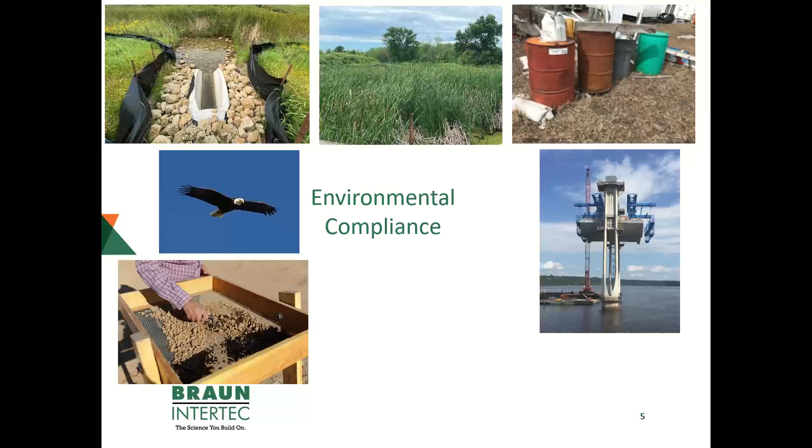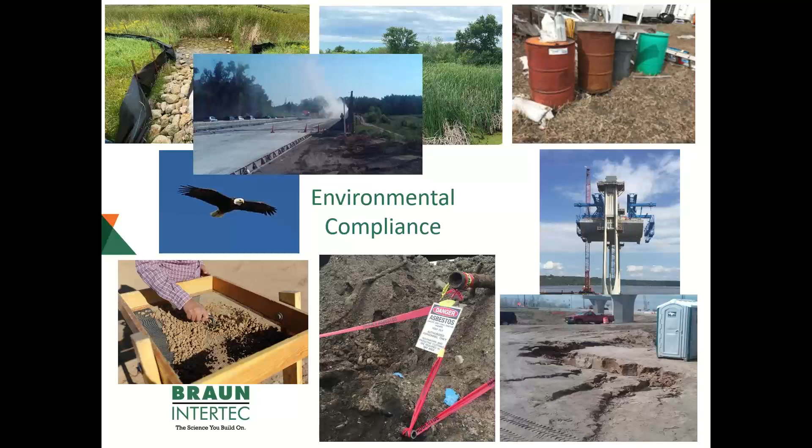There could be things like stormwater, wetlands, storage of chemicals. We have to consider endangered and protected species, work in water including floodplains, cultural resources like archaeology—Indiana Jones type stuff—erosion, contaminated regulated materials, you see the asbestos sign right there, erosion control, you see that rut, that's a rill developing from erosion issues, dust management and air quality, loud noises and vibrations, concrete management and concrete washout, spills—and believe me, spills happen a lot on construction projects, especially transportation projects—and then just general housekeeping. These all fall under that environmental compliance umbrella on a transportation project.

I've worked on a lot of transportation projects, and there are a lot of great people on the environmental side, but I haven't met one person yet who's the expert on every one of these items. If somebody's saying that, they're probably not telling you the truth. What really happens on these projects is you might have one person overall in charge of environmental compliance, sometimes called the environmental compliance manager—there are different terms I've seen. That person's ultimately in charge, but really there's a team of subject matter experts behind them for a lot of these items.

I just want to say that's a pretty scary location for that porta potty. That's all I'm going to say. Yeah, you might fall in. The interesting thing about porta potties is they're actually considered a chemical storage, so technically on projects you're supposed to have secondary containment around them, and you're actually supposed to secure them so they don't tip over. So if the ground is giving way around it, I'm not entering, I'll tell you that right now. That's pretty smart.

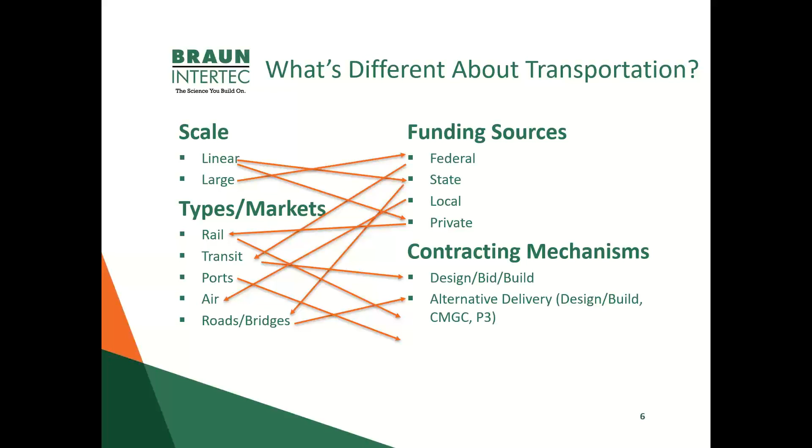You have to make sure you're looking at all of those items globally when bidding the project, but you also need a team behind you that can address each of those issues. It's not just addressing them, but being cognizant of them - especially if you're the environmental compliance manager, you have to be looking out ahead and making sure you're seeing any items that might come up, even if they're not in your wheelhouse. You have to be aware of all those things.

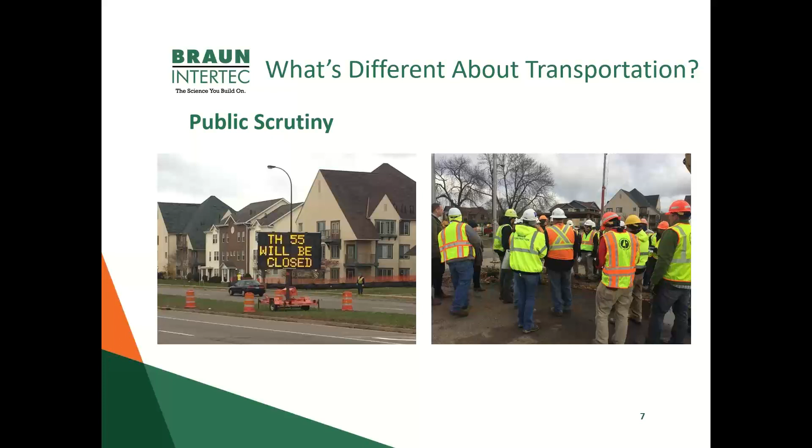The things that are frustrating for us is we'll see barrels for miles and miles, and then we won't see anybody working. They'll close down the lane, and you're like, that was pointless. I'm always like, nice traffic control, what's going on with that? Sometimes it takes hours just to set up those barrels. But again, it's that public scrutiny - that's a key item about transportation.

I don't know if you're ready, Lance, but I'm ready - that was my first AC/DC reference right there. Oh, I think I missed it. That's a little known AC/DC song, 'Are You Ready' - so there you go. I need to be on my toes a little better, you kind of sprung that one on me. I don't know if those following at home saw that, that's a pretty obscure AC/DC one. I'll get some better ones coming up. We've already gotten people saying 'are you ready,' they did it first, so that's awesome. Oh, they did? Okay, yes, awesome.

So on the environmental review and permitting side - this is a topic we could cover for days - at the inception of a project there's something called the NEPA process. The intent is your project is supposed to protect, maintain, and or enhance the environment. Sometimes that's not always feasible, but you have to go through a process showing different alternatives to try to mitigate any impacts to the environment. The big NEPA process is definitely required on projects with federal funding. Federal agencies like the Federal Highway Administration and the Federal Transit Administration have specific guidelines and procedures you need to follow during the NEPA process. Your NEPA folks need to understand the ins and outs of FHWA and FTA procedures to go through the process.

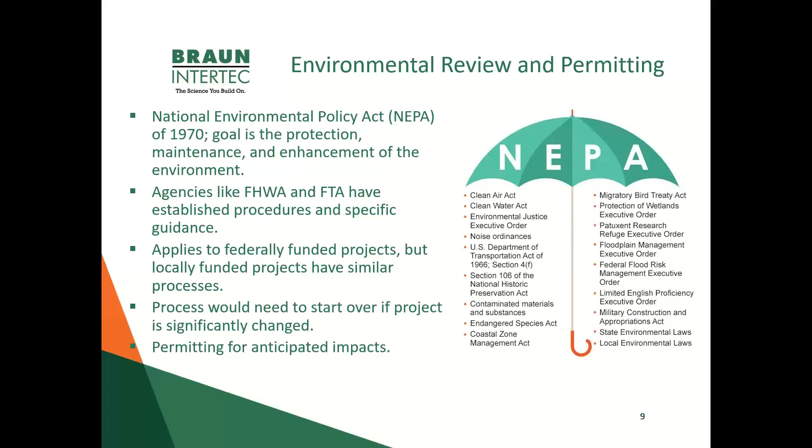I'll just gloss over it, but permitting involves wetlands permitting, 4F, and all kinds of other permits that follow along with that environmental review process to show the project is going to be compliant - not impacting significant wetlands, significant scenic and wild rivers, endangered species, and so on. That's what the NEPA umbrella covers, and if there are impacts that are allowable, that's where permitting comes into play.

That's a big umbrella. It is a big umbrella, and I can tell you that's why. Yeah, that's why we could be talking about that for a long time.

So the next thing, this is kind of what I deal with a lot, is the due diligence side. Now we talked about parcel or plat. Transportation projects take up a lot of parcels, especially if you have a brand new road project, or you're widening a road, or you need a spot to put a stormwater pond, or a park and ride, or a transit facility. Typically, to build that project, you need to buy property, and we put it in this big group of right-of-way, or you need easements or temporary easements. The important thing is, buying property for a transportation project has the same requirements as if you were buying property for a commercial project. You still need to do what's called your due diligence.

There's something out there called the Superfund Law, or CERCLA of 1980, that makes people who are buying property satisfy the innocent landowner requirements. That's showing that you're looking at a property and identifying contaminant sources or potential for contamination, and that you're aware of that when you're buying, and you're getting the proper release of liability so you're not associated with those contaminants. DOTs are not exempt from this requirement. In fact, sometimes public agencies are held to more scrutiny.

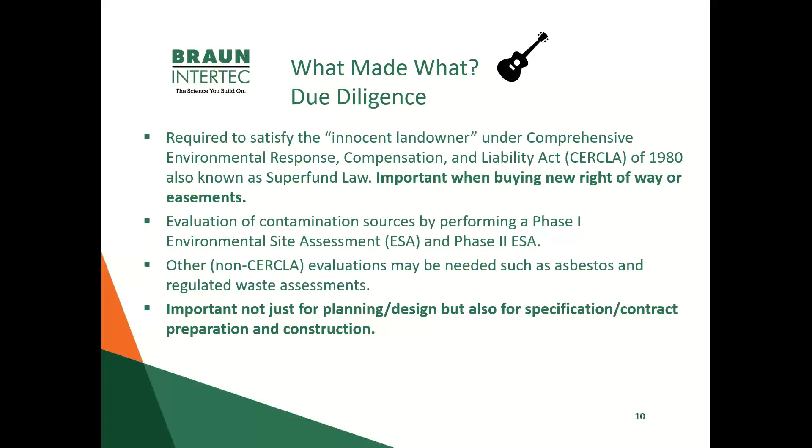So we kind of briefly touched on Phase 1 ESAs and Phase 2s, and I'm not going to go through it, but the Phase 1 side is more of a desktop review. There is a site visit reconnaissance part of it, but it's mostly looking at historical aerials, land use areas, trying to figure out if there's a dry cleaner there, it likely might have some impacts to the soil or groundwater. So it's more of a desktop review.

The Phase 2 is more intrusive, and it requires the collection of sampling to actually confirm the presence or absence of contamination. So that's where you see your drill rigs, or we do test pits sometimes, or test trenches with excavation equipment. That's where you grab your samples.

The one thing that people get kind of caught up with on Phase 2s, especially with transportation, is they only look at places where contamination might be. So, okay, well there was a tank here, so we're gonna go where the tank is. And that's a good place to look for that material, but you also need to make sure that, say, a stormwater pond is 15 feet on the other side of the tank, you might want to put your boring or your location there, because you want not only to find the contamination, but you also want to know what you're going to run into during construction. So you really need to focus your sample locations and your depths, not just to where the likely contamination is, but also where you're going to be doing construction.

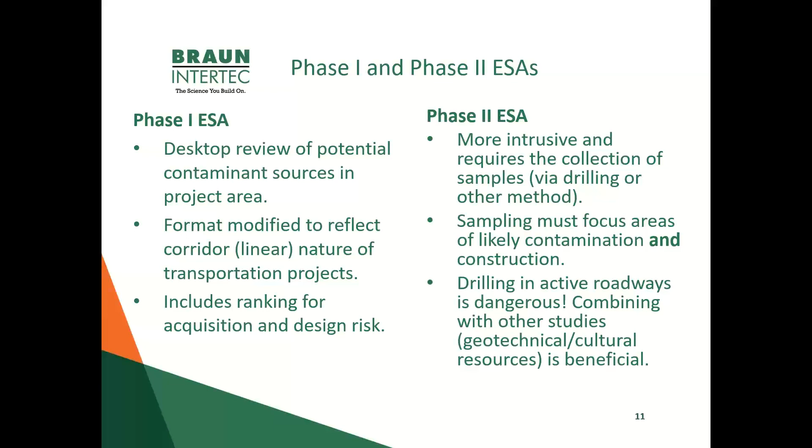So this is just a real quick example. I didn't mention this, but a Phase 1 is a little different than a typical Phase 1 for a property. The reason why, again, is back to that scale and linear aspect of a Phase 1 on a transportation project, is that you cannot look at each property individually, you would take years to do a Phase 1 if you went through each building and did everything to a standard ASTM. So a lot of times for transportation corridors and projects, you do a modified version of the Phase 1, where you're looking at the parcels and trying to put them into buckets.

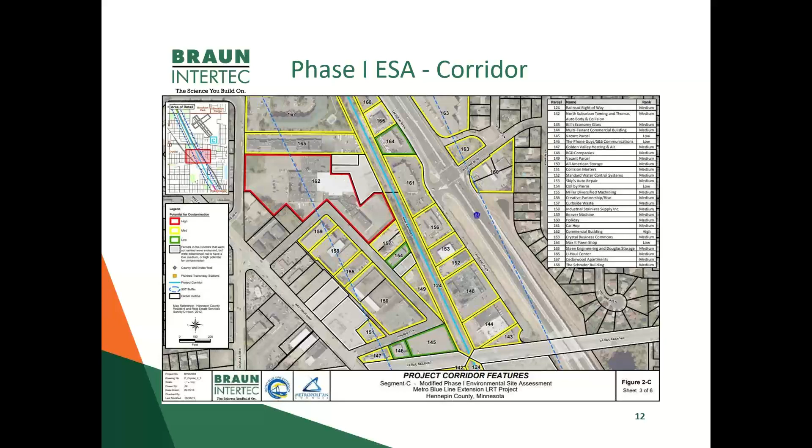That's interesting. Does that make sense? It's more of a high level view. Yeah, so it's different.

When you get a consultant that hasn't seen that type of format before, it takes a little bit of time to understand it more. It's different thinking. It would take forever if you're doing miles and miles of highway or roads - it would take forever to do a phase one on each site. So you have to be high level, and you accept a little bit of risk under that, but you have to keep the project moving.

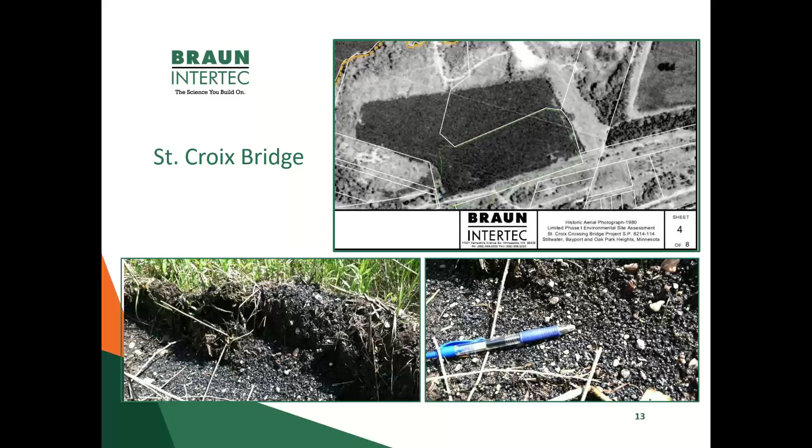Coal slag is a solid waste that can contain higher concentrations of metals and everything. For the St. Croix project, this location was selected for a stormwater pond. So we went out there and tried to evaluate the extent of the slag, because that photo was from 1980 and it didn't look like that now. We did a pretty extensive investigation of where the pond was - we quantified the slag piles, looked at all the pier locations for the bridge, and tried to quantify this all as part of the specification process, so the contractor knew what they were getting into, and we could estimate costs for the project.

The interesting thing is we were out there digging, and found out later that the slag wasn't our biggest issue. There was a dump - somebody filled in the wetland with a whole bunch of dump, and there was asbestos throughout that entire dump. So that whole project turned into a separate project where the owner bid out the pond digging in advance of the bridge project because they didn't want to slow the bridge project down. The pond was actually dug before they even started construction of the bridge, which was interesting. But that's the reason why you do some of this stuff ahead of time - it can account for the schedule and help streamline things. That's what a phase two will show you - it'll show you surprises, hopefully, if you're doing it right.

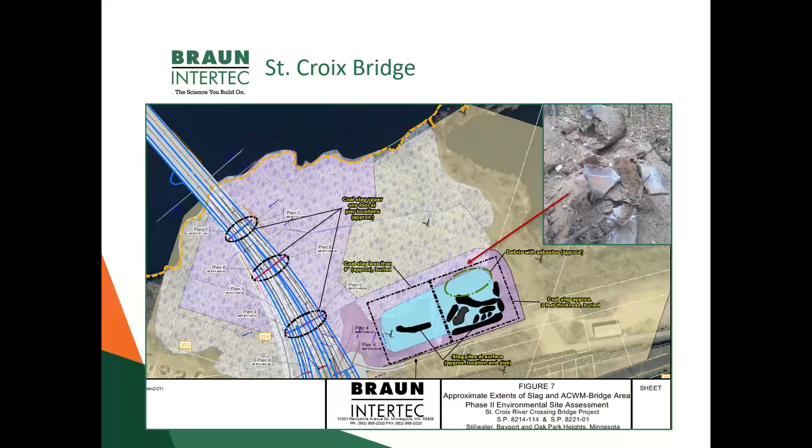I'm just going to quickly go through this. Some people are surprised to hear that there's asbestos, or what we call regulated materials, on bridges. Asbestos is still not technically banned in the US - you can't make it here, but that doesn't mean you can't import it. When you're doing a bridge demolition or repair job, there can be asbestos, lead paint, and other items on a bridge that you need to consider before doing a bridge replacement. There's also asbestos in utilities, and when you're doing a road work project, there can be asbestos on buried utilities - I've seen it on culverts. Even cattle crossings are waterproofed, and sometimes that waterproofing can contain asbestos. So again, something to consider when you're planning for a project.

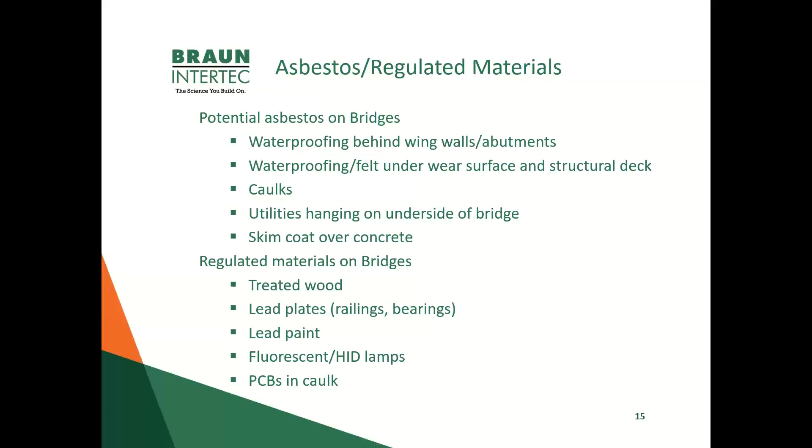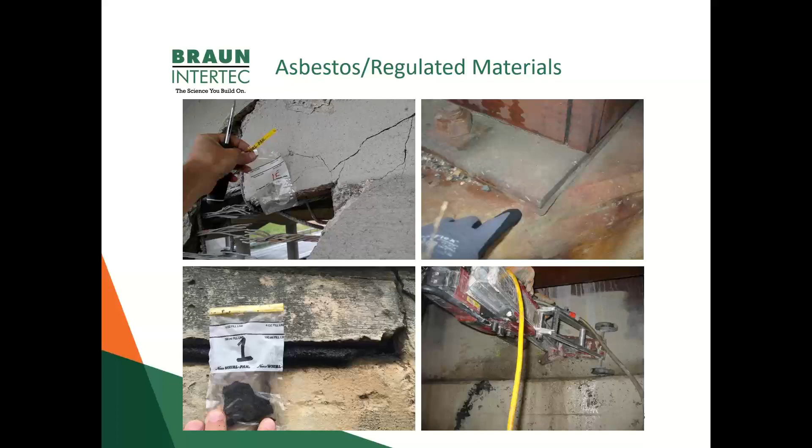So here's just a couple examples of what we see on bridges. I thought I'd throw these in so we could have some pictures of lead plates. We actually core through abutments to try to get to the waterproofing behind the abutments, because you can't always access it. That picture on the lower right is the coring equipment, showing some of the work that we do for the bridges.

Okay, so we're going to move into construction, and I better pick it up. So with construction, we've got stormwater erosion control. I think a lot of people are familiar with it. We've briefly touched on contaminated regulated materials, and then there's a natural resource component to construction that I'll go through. Again, this is going to be a lot of pictures, less text, just giving some examples.

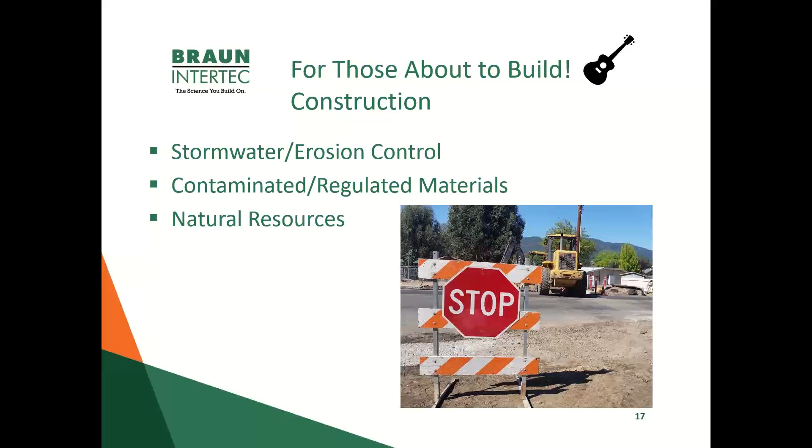Before I click on, is anybody else seeing anything there, Lance? Okay, I've been looking, and our audience hasn't seen it, so this one was camouflaged very well. For those about to rock, we salute you. 1981, AC/DC. Oh, so you are a real fan, man. Hardcore. I wish I could say that. Wikipedia helped me out putting this together. I wish I could, but yeah. So I wanted to put 'We salute you' because I really think construction, planning and design phases are really exciting, but construction is really where it's at sometimes. So we salute you, the people who do construction. Here's real quick there. Yeah, there you go. Listen, one is so hidden.

So stormwater erosion control, it's all under the umbrella of NPDES permits. There's requirements: if you're doing any land disturbance of 1 or more acres, you need to be in compliance with this permit, get the permit, be in compliance. You need to prevent erosion of exposed soil surfaces. I showed that big rill by the porta potty—that's a big no-no under NPDES. You need to control sediment leaving the project. Part of this is, some people call it SWP3, I think that's what it says in Texas. We call it SWPPP—stormwater pollution prevention plan—that you develop as part of the project and need to adhere to. So that's all part of this NPDES compliance.

There you go, I got you, you saw this one though. Yeah, I did. I gave it away—Dirty Deeds Done Dirt Cheap. It's not very cheap on projects sometimes.

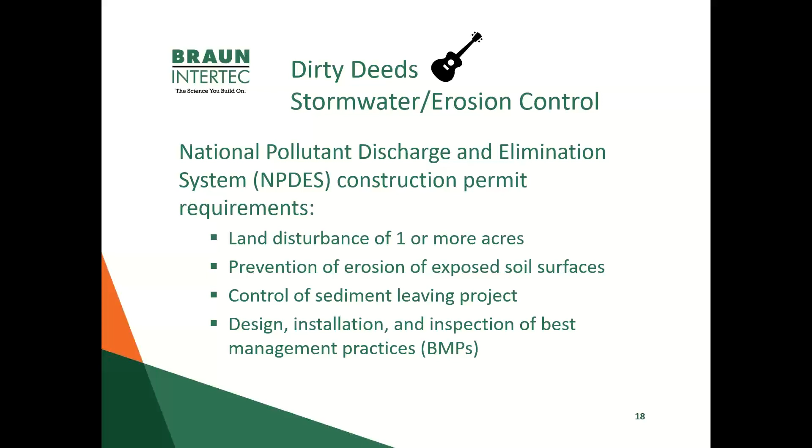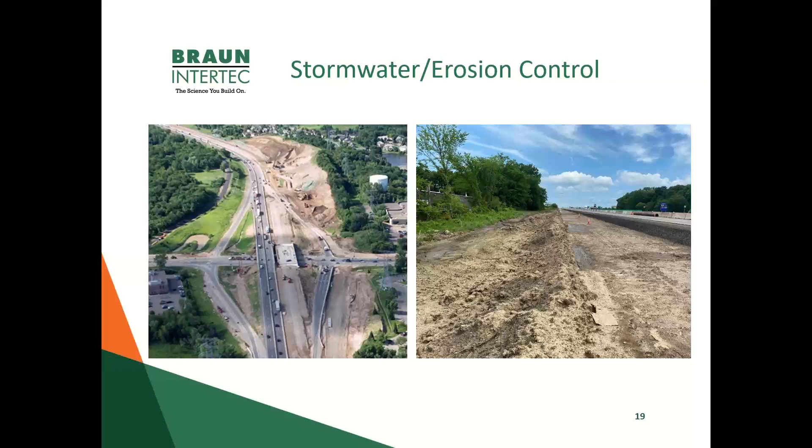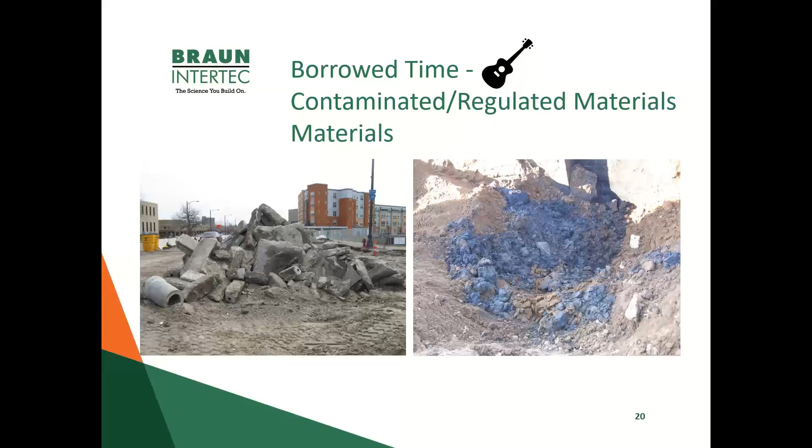Oh, there's another AC/DC reference — borrowed time. There you go.

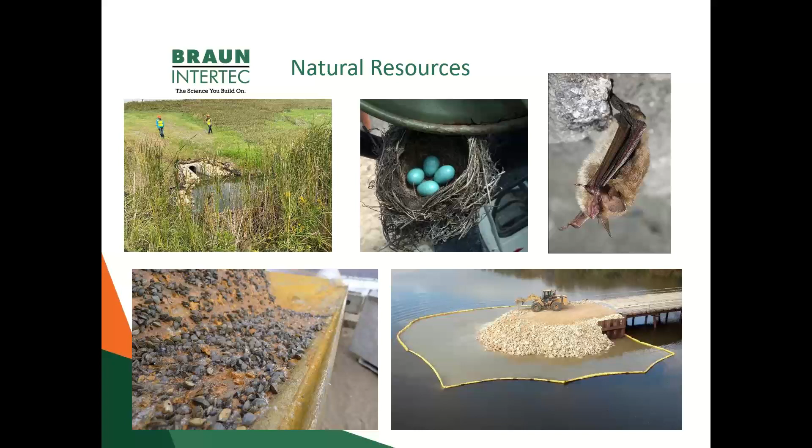So as I promised, I just thought I'd give a quick summary of avoiding these environmental compliance potholes on transportation projects. As I mentioned, be aware of the funding sources, federal funds versus local funds, and the contract delivery method - who's bearing the risk and who's ultimately responsible for environmental compliance. Because money talks.

Environmental compliance runs through the entire life of the project. So make sure that when you're starting a transportation project, you have planners, but you have a team involved with the project from start to finish, because we talked about how they can be involved with the design and mitigate risks on the design side, but also have somebody knowledgeable on the constructability side too, of handling environmental issues.

And I didn't really touch on this, kind of a gray area, but I talked about Superfund, CERCLA, and NPDES. Environmental laws are really, a lot of these laws are on the onus of the owner, or sometimes a responsible party defined by law. And as creative or as much as you can think of that, you can write a contract and put the risk on somebody else. That can certainly happen on contracts too.

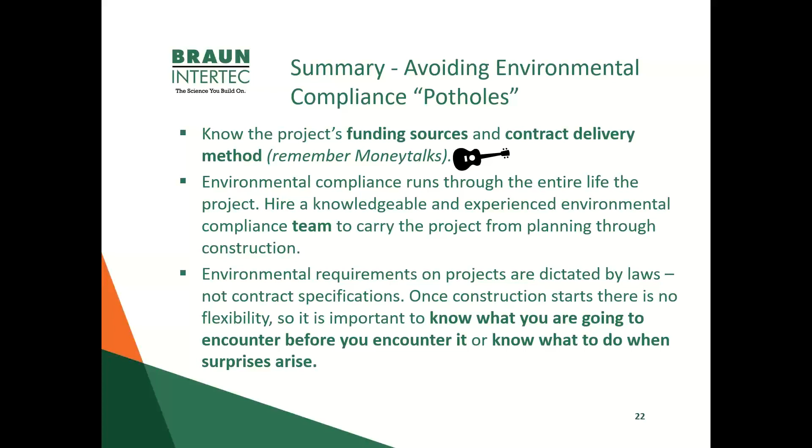So we got the money talks one. That's what I have for my presentation, but feel free if you have any other questions, audience, or Lance, you know where to find me. Here's my contact information.

So do we have anything on the chat? Nothing on the chat, and we're just really happy that we had no technical difficulties through your sleet storm in Minnesota. But we do have one question that came in.

Jackie, coal slag and asbestos dump for your bridge project, was that from the adjacent power plant, and did they pay for the cleanup? That might get too specific, but good question — the coal slag was from the adjacent power plant.

I don't know if I can comment on whether they cleaned up on it. In general, most government entities don't go after private parties for cleanup in a lot of situations, unless it's a really dire situation where they feel they need to go back to the private entity. Most government agencies don't do that; in a lot of cases they just plan for those contingencies in their budget, or avoid them altogether. But the dump material in that situation, nobody knows where it came from. Sometimes it happens when you have a riverfront or an abandoned area where nobody's watching it — people see a low spot, drive up a couple of trucks, and dump it at night. That's why in a lot of our Phase I assessments, we look for things like in that aerial photo — clearings or roads — anything that might indicate somebody's doing illicit dumping.